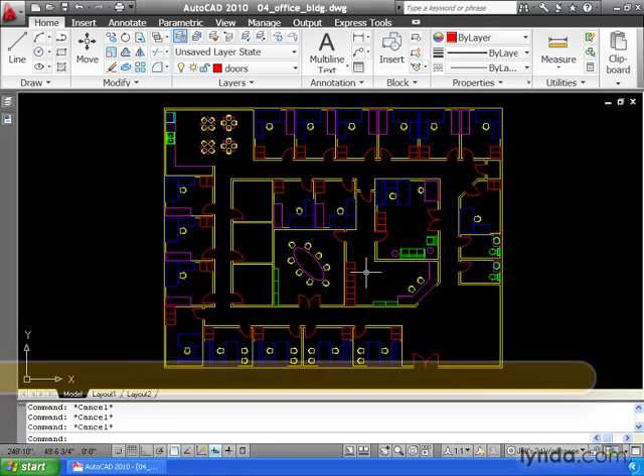Probably the most compelling reason to use blocks is that they can be redefined if necessary. By simply changing the geometry of one of the blocks, every other instance of that block will automatically update. In this lesson, we're going to learn how to redefine a block.

On my screen, I've got a floor plan for a proposed office building. Let's zoom in a little bit, and notice that I've already inserted several chairs into this drawing. Now let's assume my chair block is based on the dimensions of a real chair, and maybe after inserting all these, we decided to go with a different model.

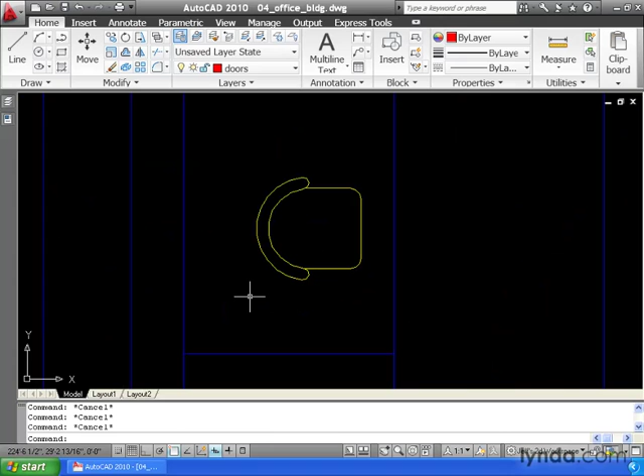Now I don't want to draw a new chair and then reinsert one at each of these locations. Instead, I'm going to redefine my existing chair block. To do that, I will zoom in on any of the existing chairs. And to redefine this, it's just like editing text. All I have to do is double-click on it.

AutoCAD will then show me a preview of the block I'm going to edit. At this point, I can also choose a different block if I like. Let's click OK, and this brings up the block editor.

Notice that my model space background has changed color as a visual cue that I'm in the block editor. Also notice that we have a new block editor tab on our ribbon. We will see this tab and these tools anytime we're editing blocks.

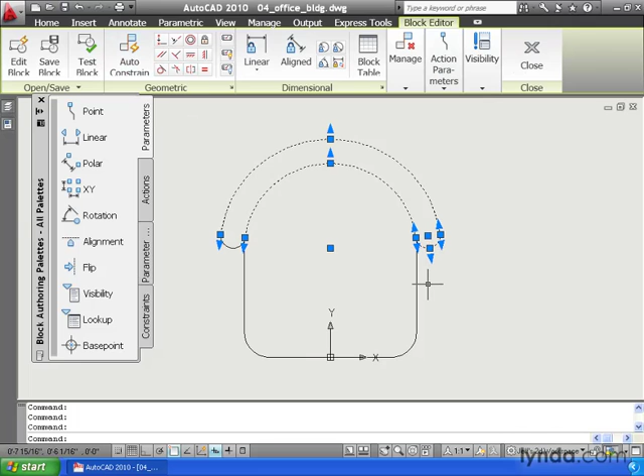Now, as you can see, the block editor does a lot of things. For right now, we're just going to make a simple geometric change. Let me select some of this geometry, just so that I can show you that the editor is giving us access to our individual entities. It's essentially the same as it was when I was creating this block for the first time.

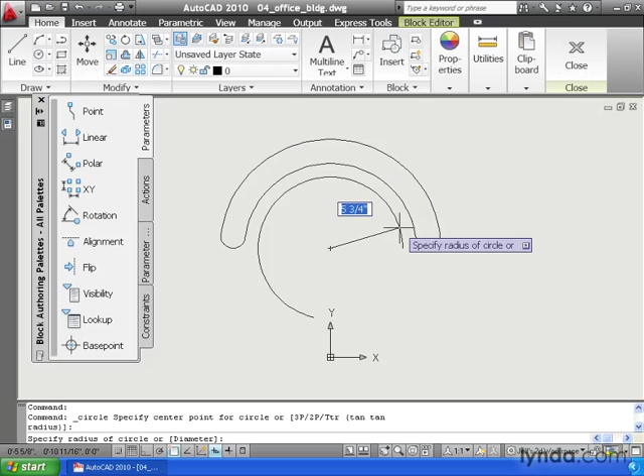I'm going to deselect my geometry. Let's go down to the Home tab, and I'm going to launch the Erase command. We'll erase the seat portion of this chair, because we'll say the new chair has got a round seat. Let's launch the Circle command, and I'll create a circle from the center of this arc to the end point of this line. We could make other changes or additions if we wished.

For right now, this will be good enough. This will represent the geometry of our new chair. Let's go back to the block editor. I'm going to come down and click Save Block, and then I'll click Close. Notice that all instances of that chair block have been updated.

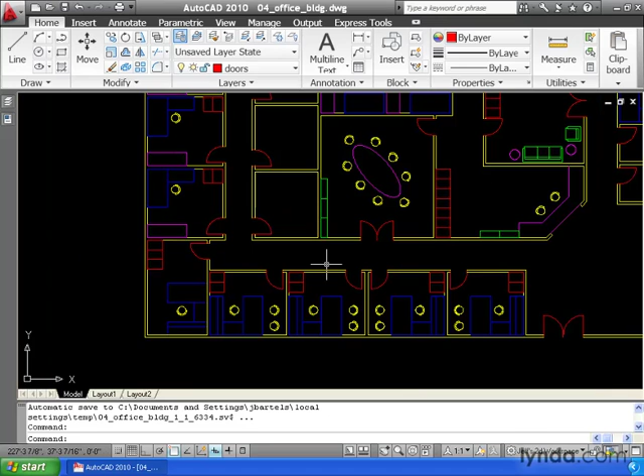Redefining a block is probably one of the biggest time savers in AutoCAD. If you have the foresight to use blocks in your drawing, making global changes later can be done in seconds instead of hours.